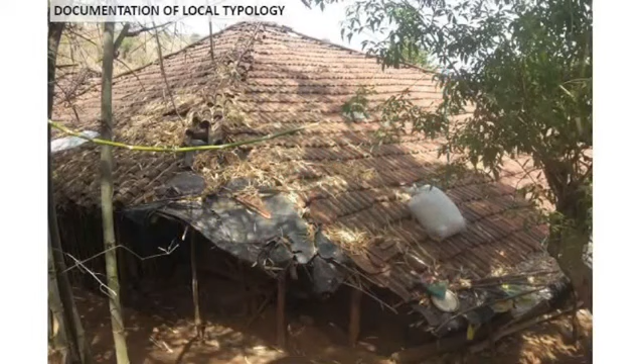There's one more where the roof is almost touching the ground. This is observed in regions with high rainfall, especially the ridges of the Sahyadri.

We were questioning our education at that point, that we were taught probably two or three or four technologies, but in this one small district we had such an array of techniques. That got us into a dialogue with the builders of our district. So we sought out masons and traditional craftsmen, trying to understand what they were doing, document what they had done in the past, and understand why they weren't doing it anymore.

At the same time, we were also documenting communities and understanding their aspirations—what the current modern tribal community or tribal youth wants.

So all of these new ideas—participatory processes, community development, traditional technology—were all new to us. Of course, we had a lot of guidance from our faculty: Malak sir, who was guiding us throughout the process, and Ajit sir, who was also guiding us throughout.

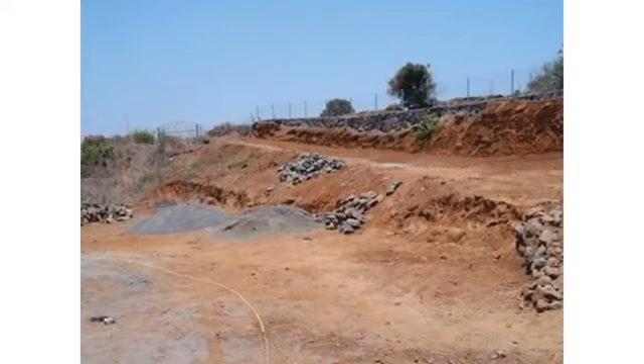I could answer this question again through a project. If you look at the land I'm showing on the slide right now, when we visited this site, it was a very small site, about 10,000 square feet.

The site had not a single blade of grass growing. The reason being, the slope of the site was altered by the contractor in such a way that every rains, kilograms and kilograms of soil would wash away, and there was no topsoil for growth of any plants. So the client came to us saying, I don't want just a house, I want a house which would sustain a habitat.

We have used a lot of waste wood in the process, along with a lot of local bricks, mud mortar, and powder plaster, etc.

Such houses enable us to use a lot of recycled material in terms of wood. Second, very interestingly, it allows us to plant trees which we use during construction. You won't be able to do that with cement or steel, where you'd need the capability to know where the cement is coming from. But here, we try to plant as many trees as we use for construction, so that whenever new constructions happen, these trees can be reused.

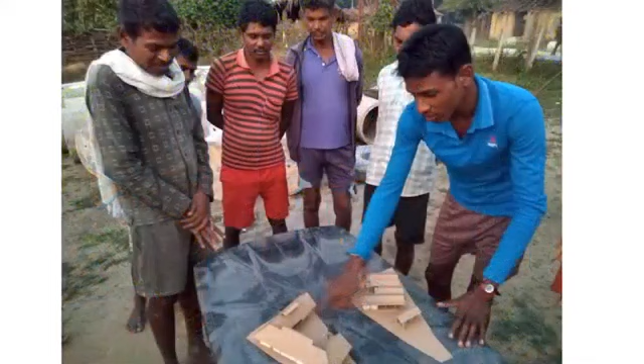We also get a lot of NGOs who want to build rural schools, rural toilets, rural temples, etc. So there is a lot of work. We also work with the government on community projects, like the picture shown here, which is a community center in traditional technology.

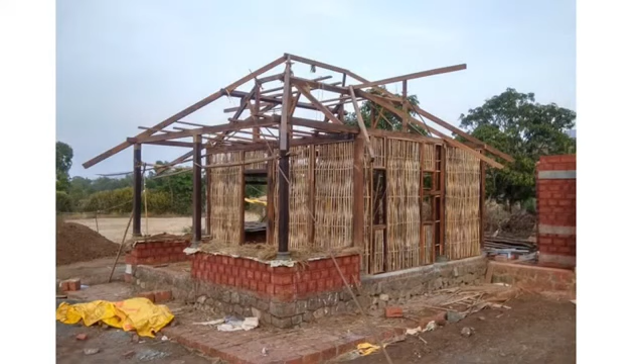Another thing we get asked a lot is whether these houses are disaster resilient. I would like to answer this with a project that just faced a disaster. This particular house is a no-cement house that we built in the Roha Taluka of Raigad district. It's a wattle and daub structure. Inside there are cob storages, mud plaster, with a Mangalore tile roof. This is how the house looked.

It just got hit by the Nisarga cyclone. All the houses around this particular house were severely destroyed—Mangalore tiles flew away, Mangalore tiles broke, trees fell down, etc. But this house, apart from its plaster chipping a bit, did not have any severe damage, no leakages.

As I said, it has cob storages inside, cob inbuilt seatings inside, a large bay window. It's a very small house again.

Are these structures cost effective is again something we get asked. Cost is a very subjective term. What we tell our clients is that the idea of cost is basically fivefold: how well detailed you want the structure, whether you want it well finished, whether you want it insect resilient, whether you want it rodent resilient, and how fast you want the structure finished. All these five factors contribute to the cost of such structures.

The design of this structure stemmed from its costing. We actually decided the technology first, because that's what determined the cost and maintenance, and then we decided the design. We kept the design very simple, something that could be executed in not more than 3 months, and something local masons could imagine very easily. In such cases, we don't spend a lot on detailing and drawing because the tribal family is quite okay with the rusticness of the house. We just make a process model of how the house will be made, explain that to the mason, and it's very quick.

However, the result is way more of an upgrade than what the family was living in. Secondly, it is a very stable structure. It is hit by annual high pressure winds in the pre-monsoon and post-monsoon, and doesn't face destruction like elsewhere where tiles fly off. Also, earthquake resilience through tie beams and everything is built into this house, with much less maintenance than the family's traditional old structure would have required.

So it's an upgrade, but not one where the person has to change his or her lifestyle. While building this house, the family planted trees again for their children, because they used the trees planted by their grandfather. So they have to plant more for their grandchildren to use whenever they build their structure.

This project was done in a very cost-effective manner, as the community might not have enough money to pay us as fees. So the whole structure was done in Shramadhan, where everyone, even us, participated in the construction process.

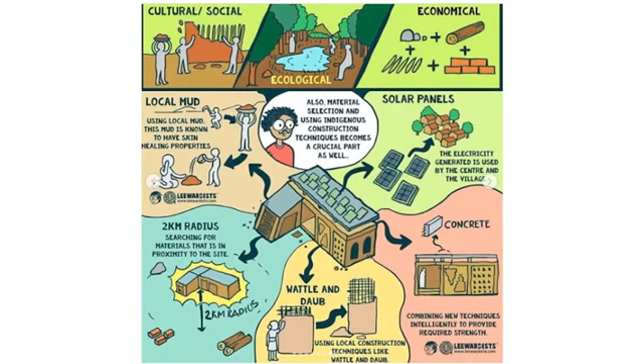In the initial project I showed you, with the tribal person, we asked that he pay us a daily wage, as much as he would pay a skilled mason. Eventually it ended up being some 10-12% of the total construction cost, but it was very easy for him to pay us in bits and pieces. And yes, obviously, when people come to us to build second homes, it's generally a percentage-based fee.

Does the government accept these techniques? The government is kind of stuck right now, because it's very difficult for them to accept this due to the huge diversity involved. Mud, when used in one place, changes after just 5 kilometers, so it's very difficult to standardize.

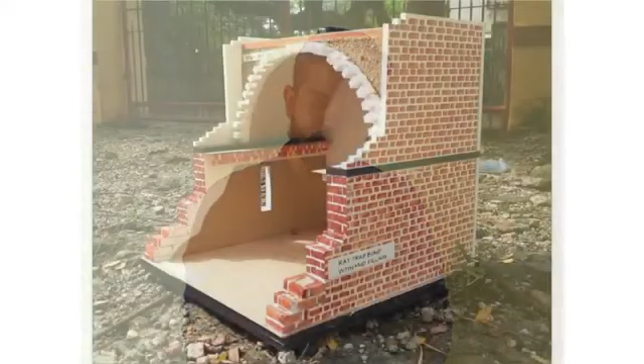But having said that, we have worked in collaboration with the government on some projects. This is an Indira Awas Yojana project - back then it was known as that, now it's known as Pradhan Mantri Awas Yojana - where we proposed certain things to government officials and executed them in villages where the government was trying to build homes.

The result was, if you see this Pradhan Mantri Awas Yojana house, it crumbles. For example, this one is built in Beed, where there is water shortage, and cement is the most problematic material there because there's no water to cure it. So why would you build such a house there? That's what triggered the dialogue with the government officials.

So what we built was with local materials. We had to get structural engineers on board to certify it and acknowledge that it would last for 5 years. Government schemes, especially rural ones, often don't mention the technique or technology in which a structure should be built - they just say it should last a certain number of years. Once you prove that, it's not so much of an issue.

So these are the IAY or PMAY houses built by us in collaboration with the community and the government. They are much more usable, they don't heat up in the summer, and they are much larger than what cement homes offer because they are cheaper. Majority of the material is reused from the beneficiary's old house, etc.

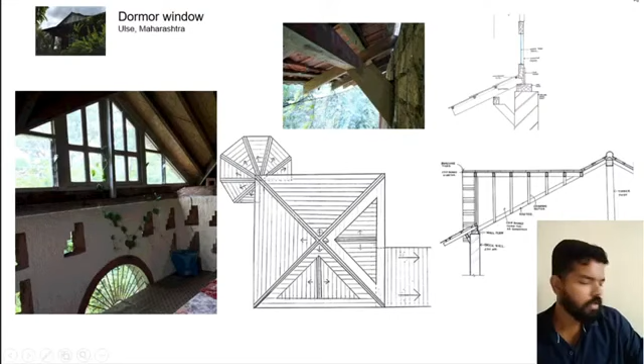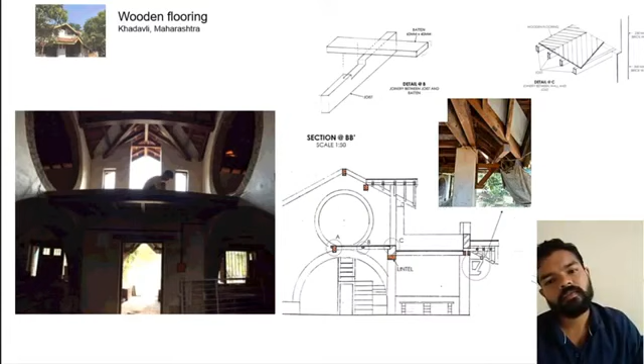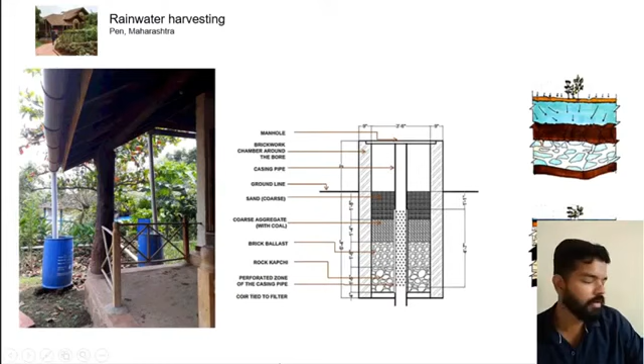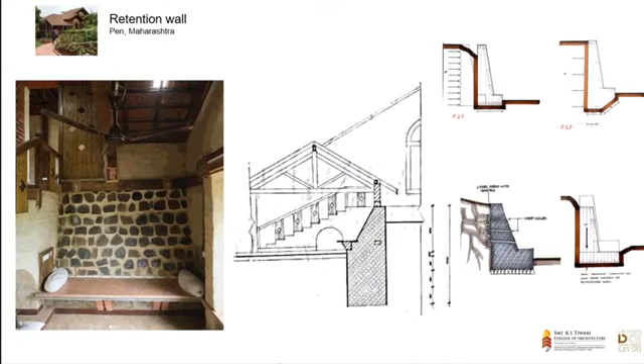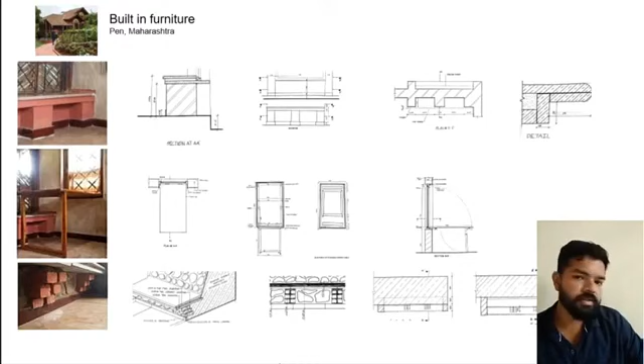Also in the same structure, we documented inbuilt furniture and bay windows.

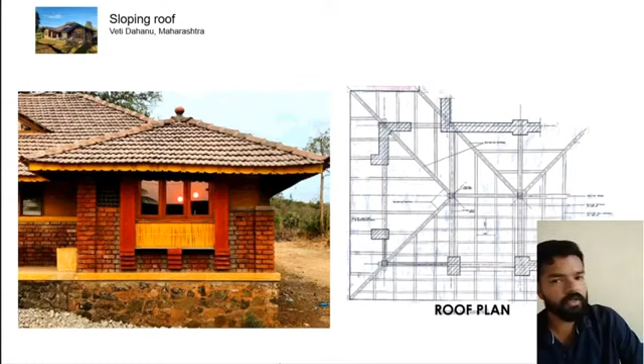We also saw various ways in which we could build sloping roofs - the basic calculations that go into deciding how to build a sloping roof, what material to take, what slopes to take, what woods to take, what joineries to use.

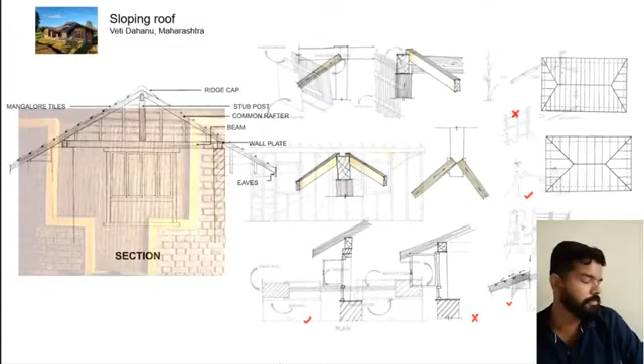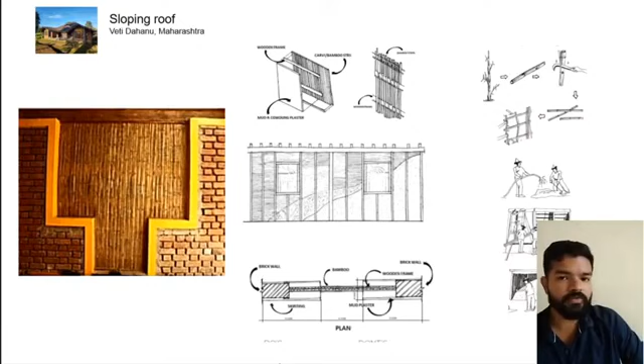And also we saw how to do wattle and daub walls, different ways of doing wattle and daub walls, and made a model of that.

And the final structure was visited to study how a cost-effective structure could be built.

So the book of all of these together is being made, but we would love for whoever wants to take the initiative amongst the students to come ahead and continue this documentation, because there are a lot of things that still need to be documented. I think we documented 9 elements, and there are many more that could be done.

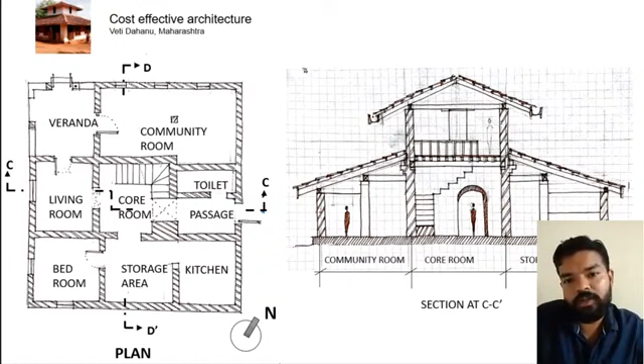So this is hopefully part 1 of the documentation. There will be many more such parts. Thank you, I think I'm done.